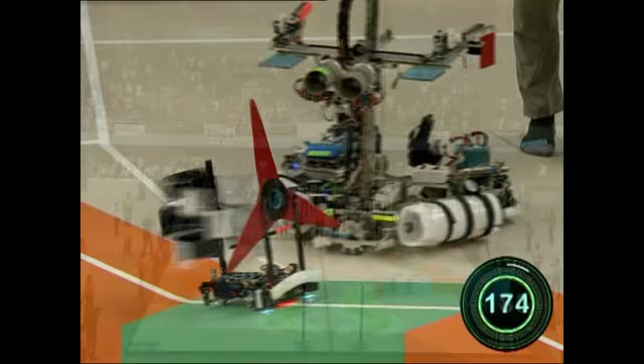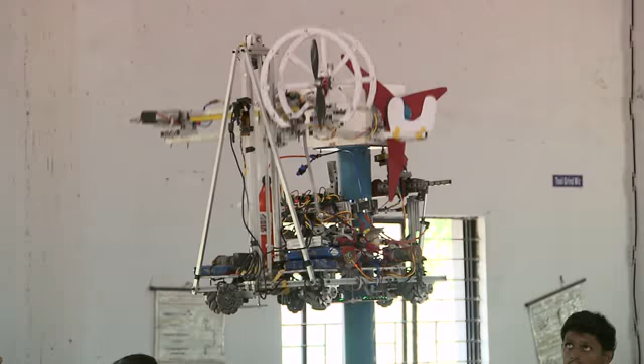Clean energy recharging the world was the unique theme chosen for this year's contest, which emphasized the need to use environment-friendly energy resources. The game field was a beehive of activity, and the eagerness of the contestants and curious spectators was approaching a crescendo.

The battle for supremacy was about to begin in this unique arena. Expectations were running high for both teams, as the final match of National Robocon 2016 was about to begin. The battle was tough, with many make or break moments. 5, 4, 3, 2, 1, start!

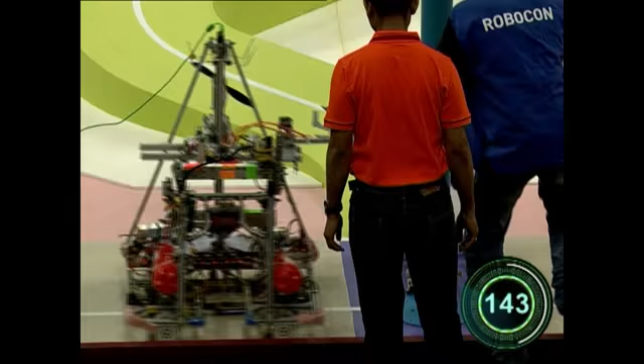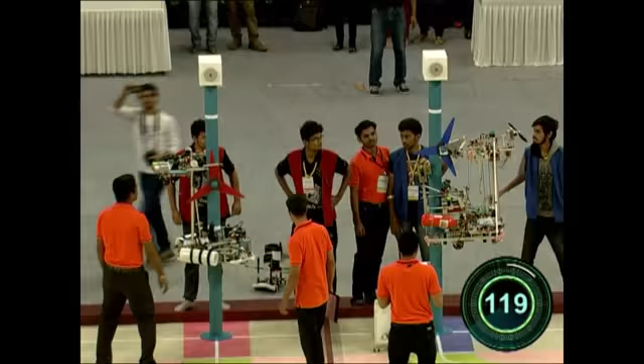Vadodara Institute of Engineering and College of Engineering Pune were two equally matched opponents, trying to outdo each other to win the coveted title of National Robocon Champion. It was a close match that could have gone either way, but finally, the team from Vadodara Institute of Engineering emerged as national champion in Robocon 2016.

It is Vadodara! The Techno Champions of Robocon 2016 come from the city of Vadodara, previously known as Baroda. Vadodara is the third largest city in the state of Gujarat. This city is a unique blend of ancient lineage and the modern marvels of our time.

Home to the Gaikwad dynasty, the city has many structures like the Maharaja Palace. The Lakshmi Vilas Palace is a standing monument of the royal lineage of the city and is home to the Maharaja of Baroda and his descendants. Known as an important cultural and industrial hub in Western India, this city is also home to the largest university in Gujarat.

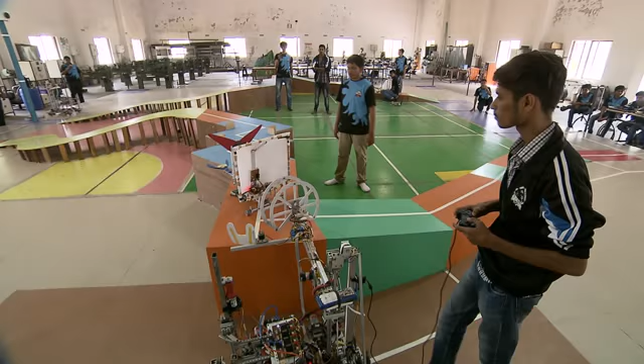One such premier institute is Vadodara Institute of Engineering, or VIE. VIE was established in 2009 with an objective to give value-based quality education to students. The institute is situated in a serene and picturesque campus spread across 31 acres, a perfect setting for the young and budding technocrats who wish to widen the horizons of their knowledge. Amongst these knowledge seekers were the national champions of Robocon 2016.

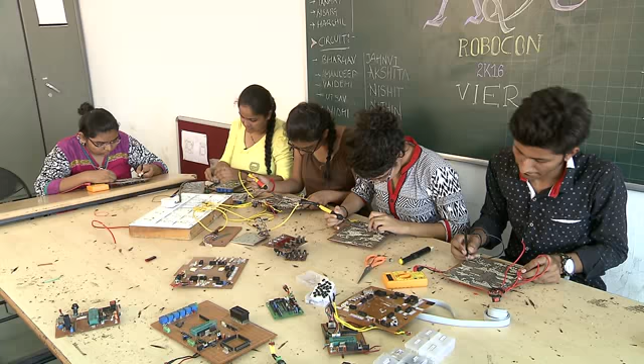A winning team is a unit that has perfectly achieved unity in diversity. This thought drives Team VIER, which has a perfect blend of students with multiple skill sets who are focused on fortifying the team's strength with their individual expertise.

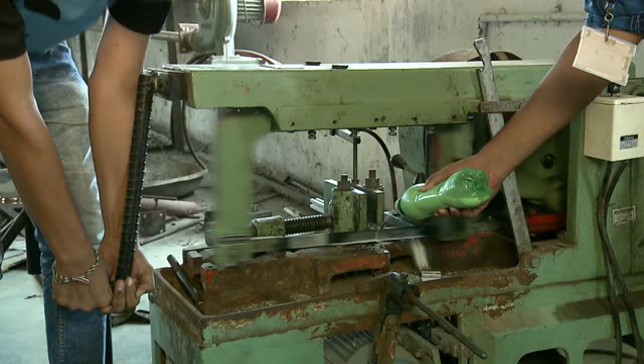Every team is as good as the mentor who guides them. Hence, the role of the faculty members was very crucial in grooming the VIER Robocon team.

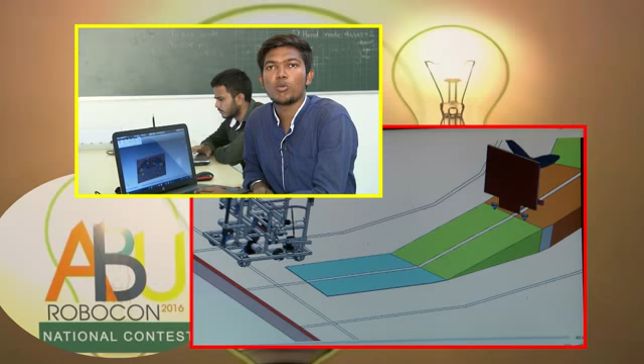Myself Umang Patel, from mechanical designing. We set up the eco robot and hybrid robot on the arena, and then we check that the eco robot and hybrid robot dimensions are not affecting our arena, and not touching any portion of the arena.

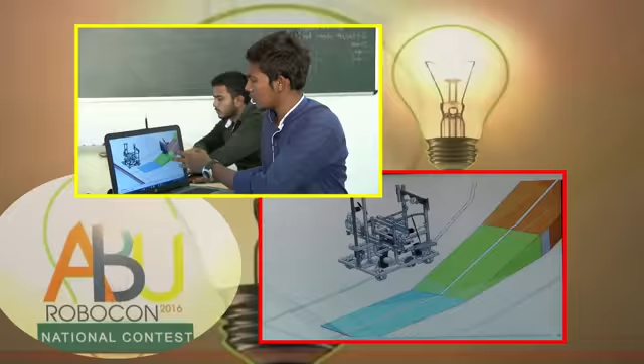Here, we turn out the hybrid robot and push the eco robot from the propeller, and the propeller uses the BLDC. Then we set up the dimensions, and we add sliding motion, rotary motion, and linear motion, and set up the hybrid robot to push the eco robot on the main game path, on to line sense.

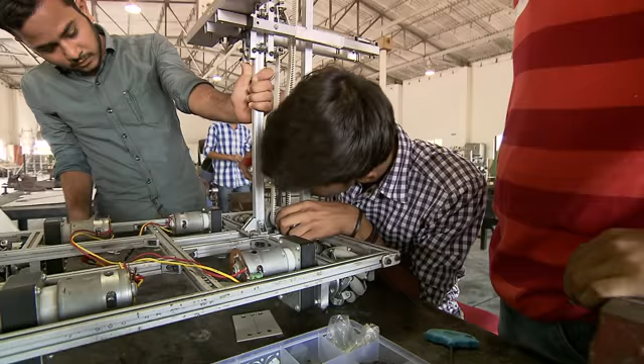Faculty members are the guiding posts in the chaos of creativity and competition, who keep the team grounded and in sync with the unified vision needed to tackle the problem statement at hand.

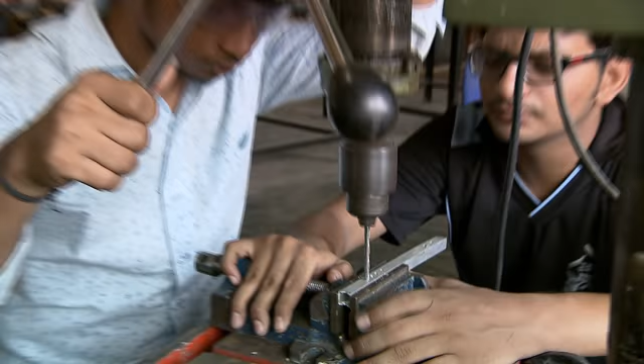Every new problem statement throws up new challenges for the team. First of all, we select the mechanism of a hybrid robot, choosing between the Omni wheel or Mecanum wheel. We select the Mecanum wheel for the hybrid motion, and then we select the up-down motion, using a special attachment and special mechanism for up-down motion and horizontal motion.

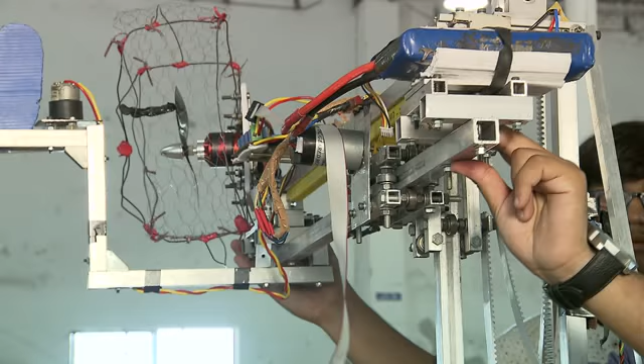For horizontal motion, we select the rack and pinion mechanism, and for vertical motion, we select the belt and pulley mechanism for up and down motion.

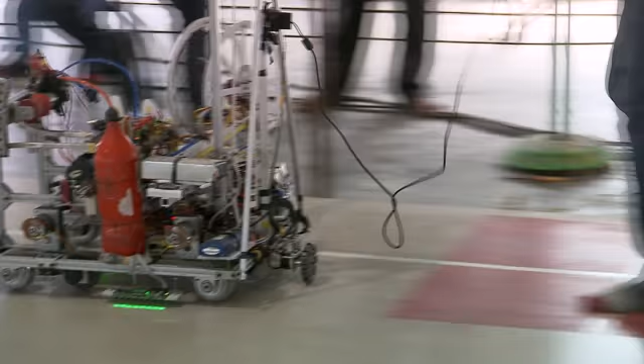New challenges throw up the possibility of unlearning and starting afresh. Thus began the phase of research and development. The Robocon team did not leave any stone unturned to put their best foot forward in preparing for the competition.

The programming algorithm that we have used is PID, that is, if the sensor is on the line, it checks for errors and gives the degree automatically.

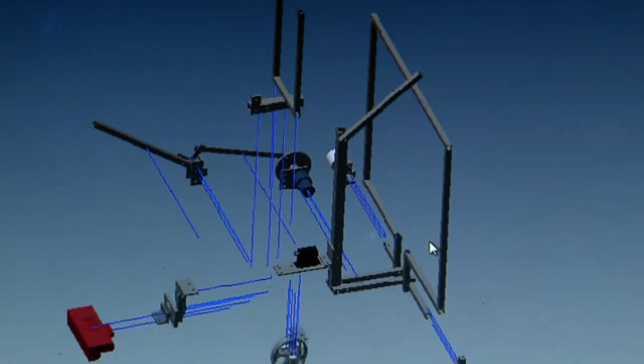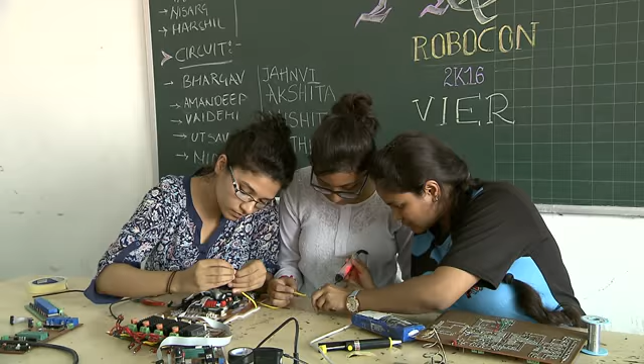Research and development means a lot of knowledge gathering and sifting through data to get useful information, which could go a long way in deciding the winning strategy for the team. This crucial activity was made easier with the help of the state-of-the-art library of the Institute, a treasure chest of knowledge available at an arm's length.

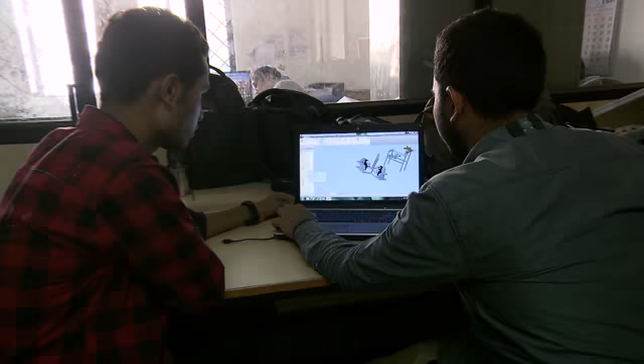For the programming purpose, we are using Bascom AVR IDE, which works with VB script. It is very easy for programmers, so we are using this software.

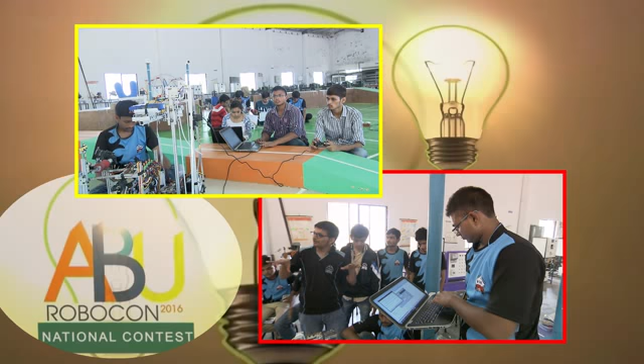Getting the design right is the most crucial aspect of Robocon, because design is key to ultimate victory in the game arena, and a lot of thought goes into choosing the perfect design for the robot.

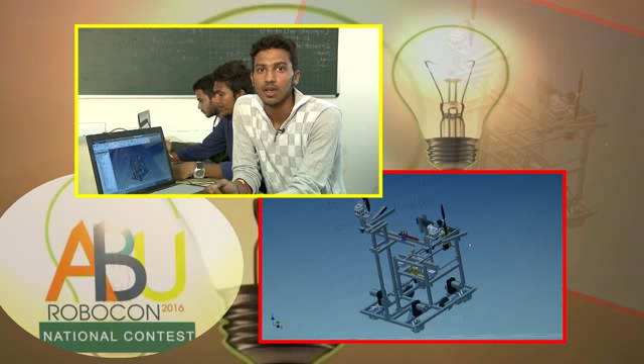Hello, myself Divyendras, and we are team members of mechanical designing. First, we do R&D on different conceptual ideas, then make designs based on the criteria of dimensions and weight limitations.

The era of virtual designing has made it simpler to try and test various design ideas till you narrow down on the perfect one for your team.

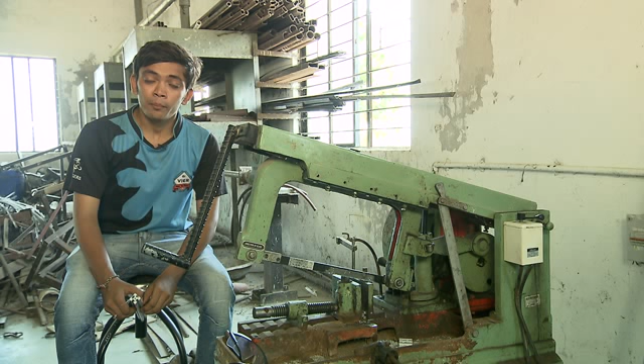My name is Kishan Ogase. I am a sawing machine operator. Generally, we use extrusion sections in our robots, so it is important to cut that section very accurately with precise dimensions and a higher surface finish. So we use this sawing machine to cut down those sections. We can see this surface.

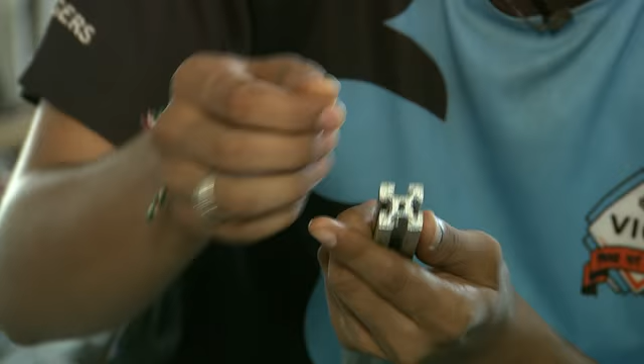It's very smooth and very high accuracy, so we can easily insert the nut inside those sections. This makes the assembly very simple.

The right design is just the first step in a big journey in the world of robotics. The actual building of robots is like giving birth to a child and watching it grow day by day.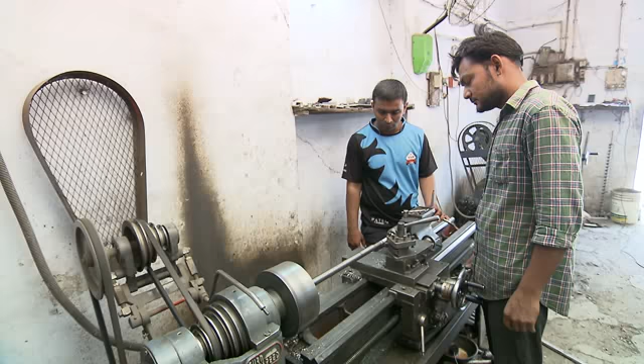My name is Dhaval Patel. We bring all our aluminum sections, bearing house materials, and shaft materials which are used in our robot from here. We bring aluminum sections used for giving motion in horizontal and vertical directions. We also make bearing house material from material of thickness 19 to 20 mm, which is used for giving motion in our robot.

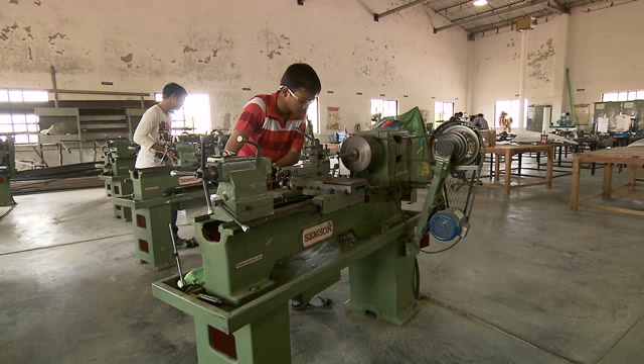Getting just the right components to serve the right purpose is an unending search. These are the very components that ultimately decide the optimum performance and quality of the robots built by the team.

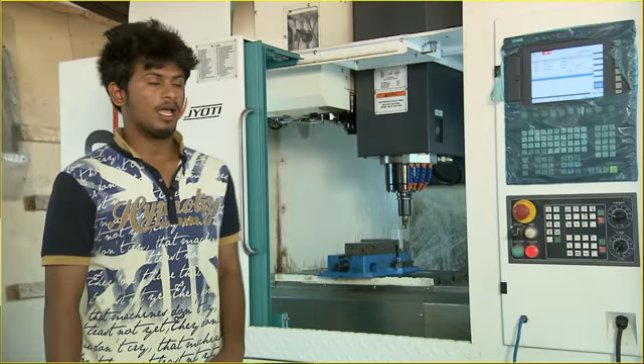My name is Biren Trapasya, and I am operator of the VMC machine. We are using this machine rather than a simple milling machine because its accuracy is very high, up to 0.001 mm.

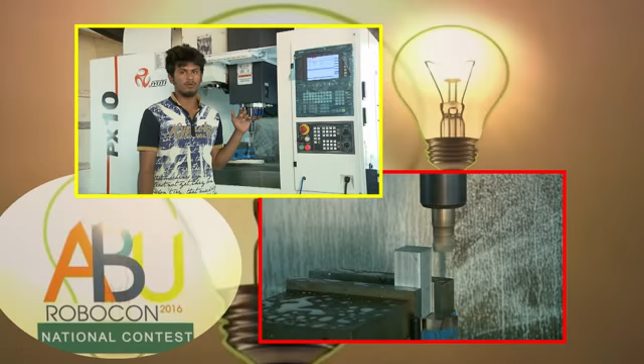Bringing the hardware to life in a literal manner is the function of the software in a robot. Software is the heart and soul of a robot.

Bringing robots to life is a job entrusted to the best programming brains in the VIER Robocon team.

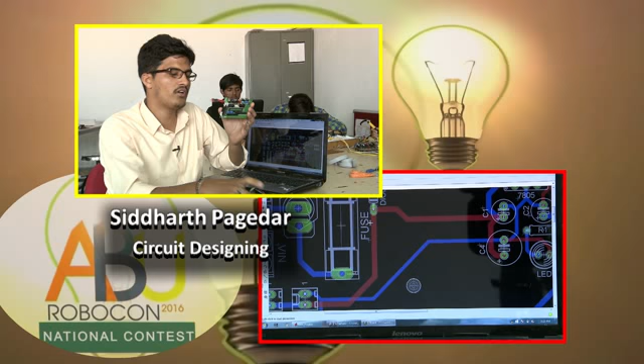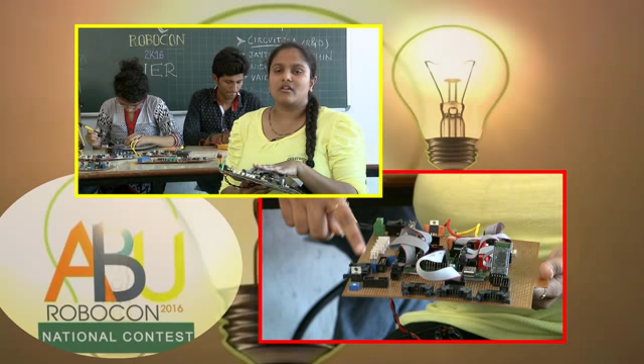After the PCB designing, this board comes to this size. In this circuit we can use either Atmega 128 or Atmega 2560. This circuit is reliable for both controllers at any time.

Once the robots are live and breathing, the stage of intensive testing and rectification comes into play.

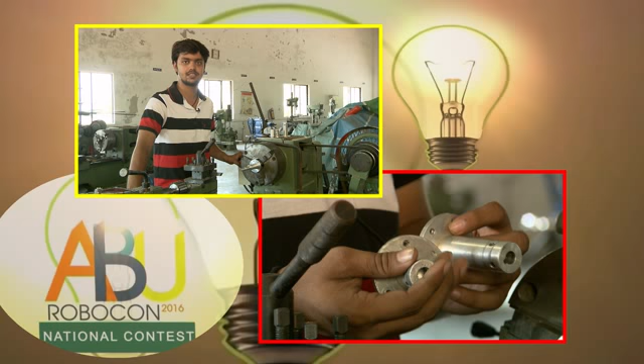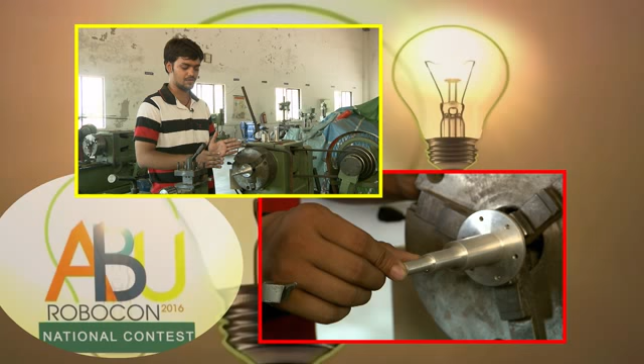My name is Mehul Rana, and I have been a participant in Robocon for the last 3 years, and I am a lead operator in my team. I have been making different types of shafts for the last 3 years, and according to different considerations of the robot design, I make different types of shafts like this and this.

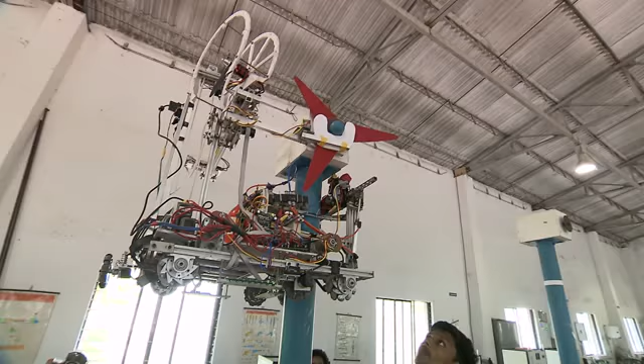This is a stage of many trials and tribulations. There is much heartbreak too at this stage, as at times the team has to go back to the design stage to get the perfect working machine to suit the task at hand.

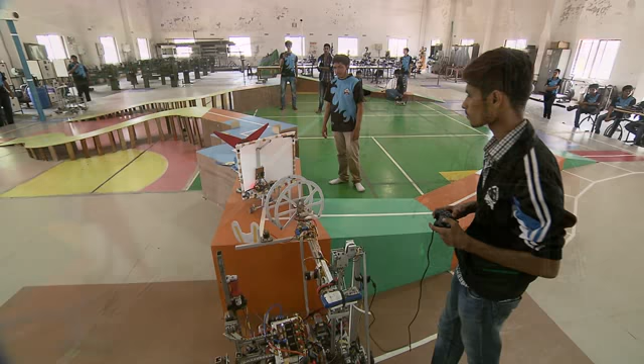After numerous iterations of testing, the robots are finally ready to take to the game field. Once the field was set and the machines were in action, the team members were gleaming with pride.

After the Eco Robot reaches the wind turbine station, the Hybrid Robot gets the wind turbine propeller from the Eco Robot. Then the Hybrid Robot climbs the wind turbine pole and assembles the wind turbine propeller onto the wind turbine engine attached at the top of the pole. The team that successfully assembles the wind turbine propeller first is the winner of the game. This type of winning is called Chai-yo.

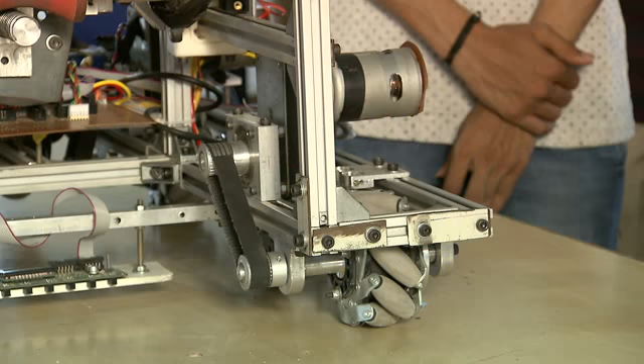This is the mecanum wheel, and we have used the belt pulley mechanism for this motion. The advantage of this belt pulley mechanism is that if we change the ratio of the pulley, we can get a different speed. This is our arm.

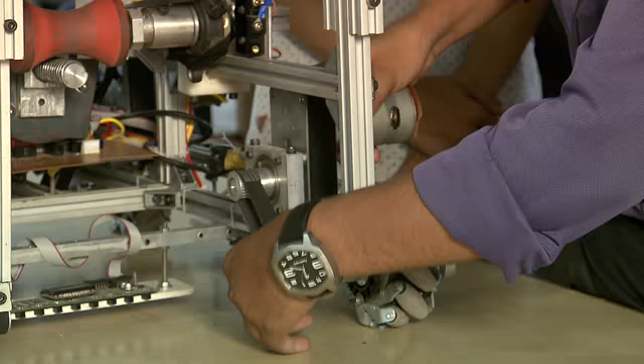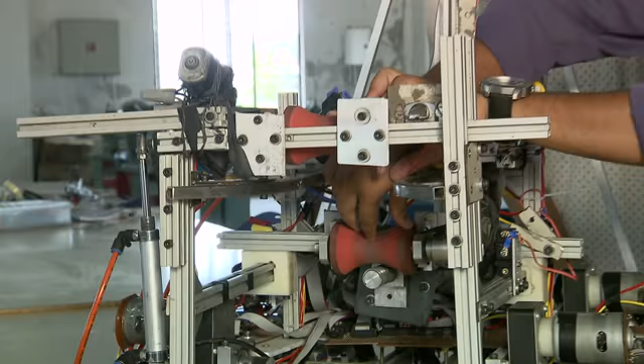We have given vertical motion to this arm using the belt pulley, and for the horizontal motion, we have given a rack and pinion mechanism to move this arm horizontally. Then this is the climbing mechanism. We have used two rollers for climbing, with a lead screw. Using the motor, we tightened these two rollers to the pole.

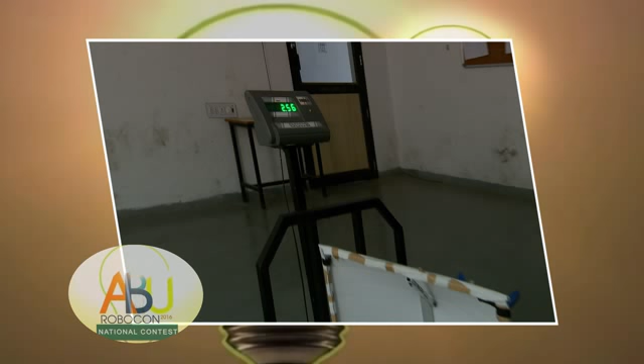It is the result of the hard work of our students with dedication that we won Robocon 2016 at Pune. It's our great privilege that we are now going to represent India at the international event, and we hope our students have worked very hard day and night. So we are going to earn some credit for India and our Robocon team. Congratulations and best of luck, Robocon India.

As the creators of these unique machines, the VIER team went through all the highs and lows of bringing up a child. There were busy days and sleepless nights that went into perfecting these robots. Yet every member was focused on giving his or her best at the Robocon contest.

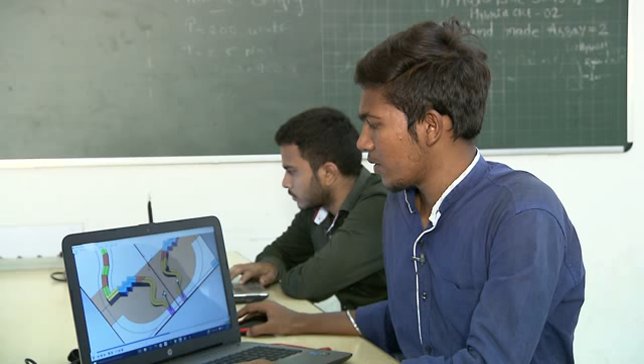As the days went by, the Robocon cell became a home to these enthusiastic students, and the buddies in the team became their family members. They spent more time with their Robocon family than their actual families.

The successes and failures of the team were moments of special bonding, as the spirit of unity was fortified even more in such tender moments.

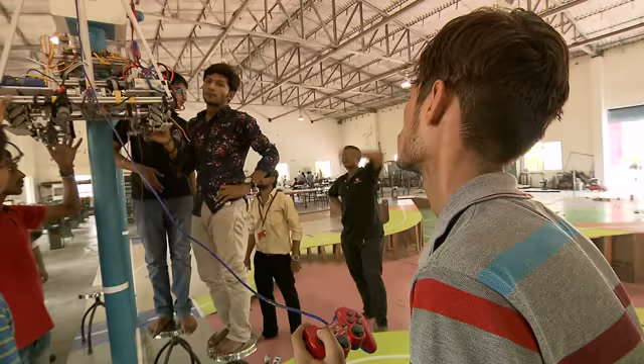As the preparations for the contest reached a crescendo, there were numerous moments of anxiety and self-doubt, but the solid and unconditional support from loving parents and guiding teachers kept the team continuously encouraged and motivated.

Hi, I am the instructor of the Robocon team of Vadodara Institute of Engineering. We are about 70 students in our team. We have worked hard and won the National Robocon 2016 of India, and now we are going to represent India at the international level. We are excited and doing more hard work. We hope we will perform our best.

All the hard work of Team VIER led them to the national championship title. And now Team VIER are ready to fly to the next orbit of success as they prepare to recharge the world with clean energy at International Robocon 2016.